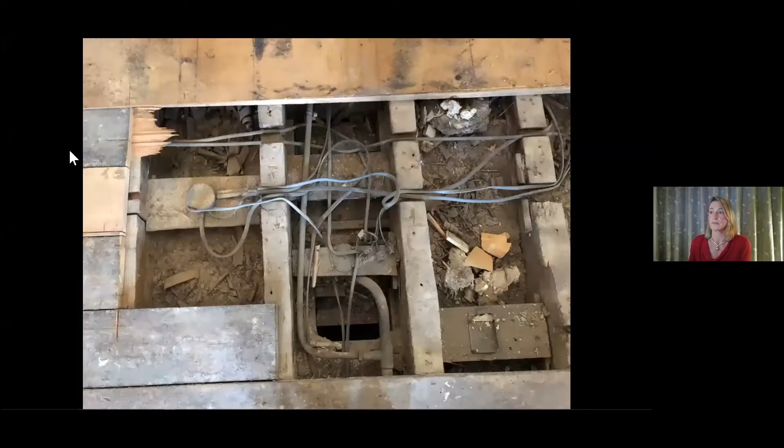Oh, sorry, I've gone too far. Oh, there we go.

It's the excitement of discovery. So even now, when I've been grubbing around under floorboards for nigh on 30 years, not quite, Ian, it's still exciting to find out about a building. So my colleague Prema and I visited a site a couple of weeks ago. The lovely maintenance team had raised some of the floor for us so that we could see and measure a beam that we knew was there because it downstands into the room below.

And we were faced with this rather unpromising pile of dust and joist tops and apparently no beam, until we went up close and did a bit of dusting and revealed the top of a steel flitch sandwiched between two chunky timber sections. The beam was there, but hidden in the dust and the pugging layer and the services. And it runs under the floor like this.

It's a connection with our predecessors. We can use their drawings to get an idea of intention, at least, even though there are clearly never any guarantees that the building was built that way, or indeed that it is still that way 40, 80, 280 years on. This work forces really good observation skills. There's no point being able to do brilliant mathematics if the materials you're working with are flawed.

You need to know about a wider group of materials than we get taught about in our standard university curriculum. Cast iron, wrought iron, vaulted masonry, timber, poor quality early concrete. You need to understand that the failure mode of a cast iron beam is completely different to the failure mode of a timber beam. And that difference will inform your attitude to risk in those different situations.

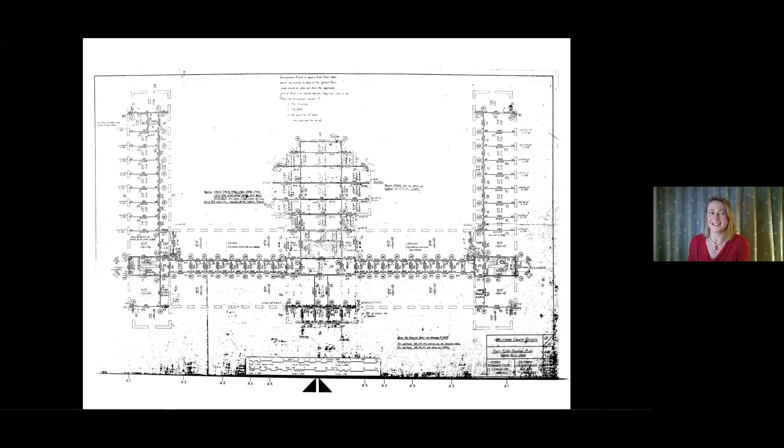You need to understand the history of the building itself, what it was built for, how it developed over time, whether it's had any major refurbishments, and therefore what techniques and materials might be associated with that. And you need to be able to put yourself in the shoes of the person who built it. What were they trying to achieve, and did it do what was intended? It's a world in which you have to expect the unexpected.

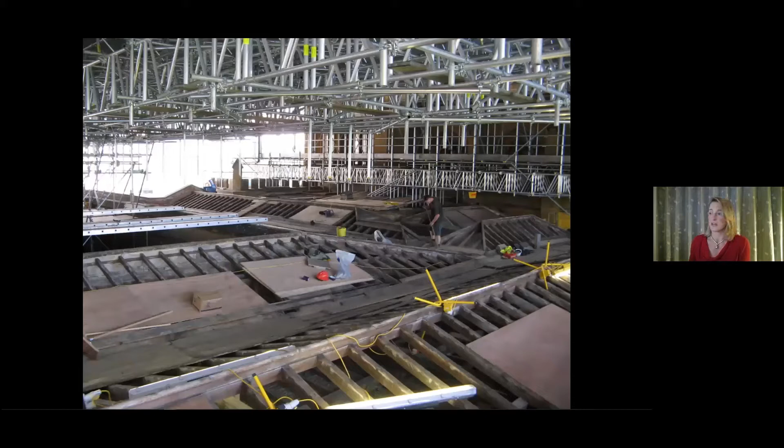So this is Toddington Manor, high Victorian Gothic in Gloucestershire, Grade 1 listed, built in the early to mid 1800s, local stone and timber and some cast iron. And these are the roofs. They look, if a little shallow, perfectly normal and regular, and indeed they turned out to be made of really lovely high quality oak. And when we opened them up, they had a perfectly sensible arrangement of trusses and purlins.

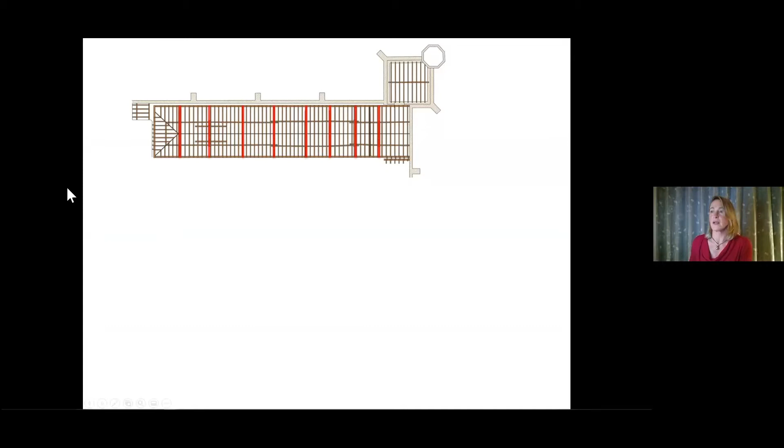So this is it on plan. But when you look in elevation at the trusses, they are completely mad. Each one is different from the next for no apparent reason whatsoever. It's like the carpenters were having a competition to see how many different ways they could span a space.

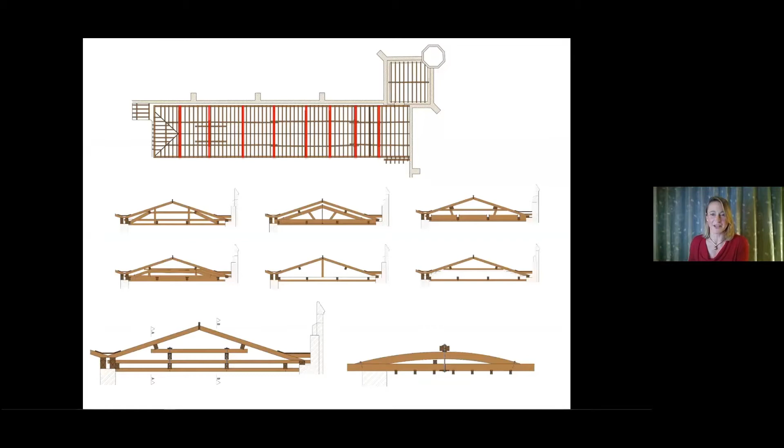What it isn't is guesswork and instinct. Although some of the things I will show you started from an instinct, the instinct comes from experience and it's supported by science. So we observe, we test, we do calculations which we know are flawed and yet give us a feel for what we may have in front of us.

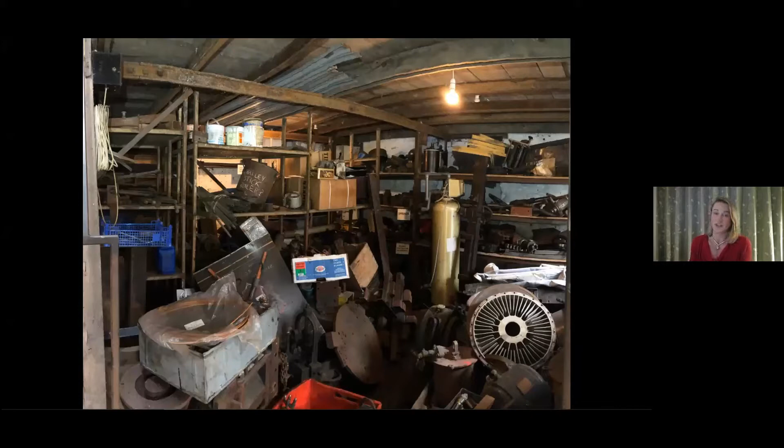We use technology as it becomes available, especially in measuring and monitoring. It's a world where you have to be a bit clever in how you test things. So this is a building we're working on at the moment in Wales. It's the Festiniog Steam Railway. And the mezzanine floor structure in this building is formed not from beams, but from sections of rail, because of course, that's what they have to hand. And it has some pretty weird connection details. So the column, the primary beam, the secondary beam, and the corbel on which the beams all sit are all sections of rail.

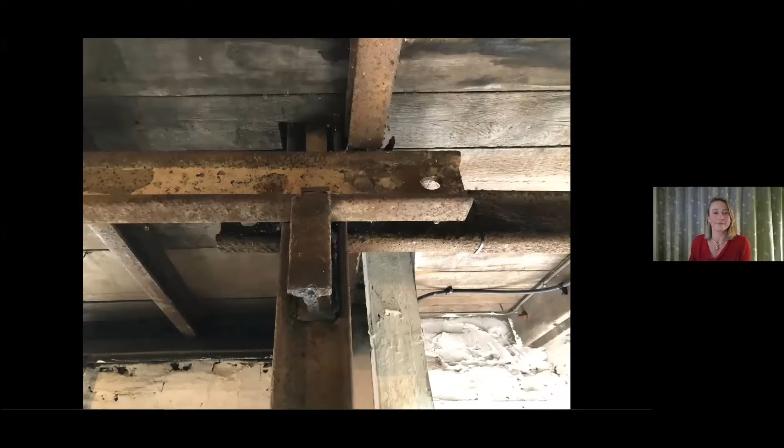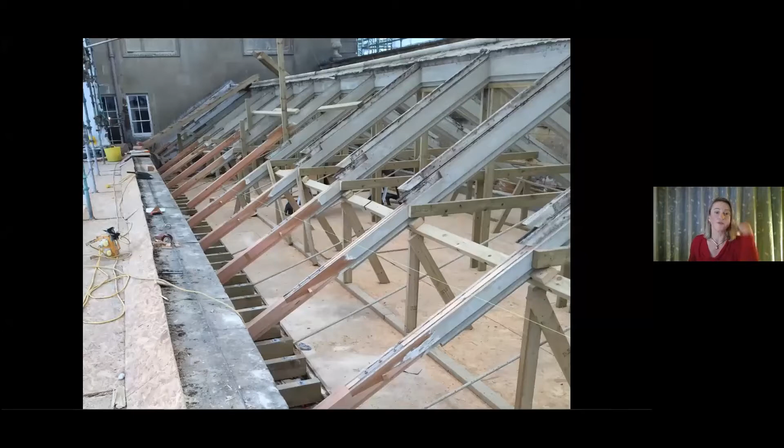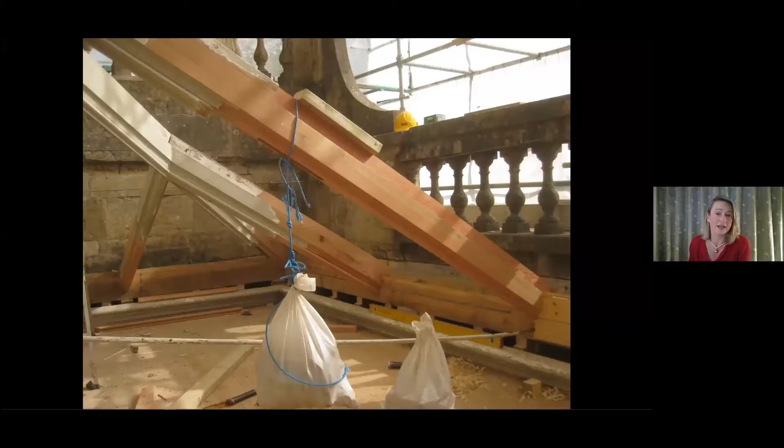There are undoubtedly moments when it all feels a bit like this. And while it's not guesswork, it does force you to use engineering judgment. There are no codes to tell you whether your slightly rotten beam end is still well within capacity or right on the edge of viability. You have to be ready to consider how something might fail and therefore whether what remains is sufficient with sufficient safety factor. You have to question whether you need to repair or strengthen or whether you can just leave something alone.

So I'm going to show you 3 buildings from the many we've worked on over the years, and they show 3 different approaches. One is fairly typical of the interventions we make. It's visually unobtrusive, but very necessary to support the ongoing life of the building. A second has 2 examples where we could have done a lot more work, but managed to monitor and negotiate our way out of doing anything. And the third one is a quick one, which is a much more modern example. And as always in these kinds of projects, the skill lies not so much in designing the solution, often that bit is relatively easy. The issue lies in defining the problem and agreeing the constraints. So onto some case studies.

This is Boston Manor. It's grade 1 listed, it's in West London. The main core of the building dates from 1623, which is these 2 gables here, this block here. The third gable on the left was added in 1671, and the 2-storey extension, which here is hidden behind the trees, was built sometime in the mid-1700s. And it's an amazing building. Inside, it has some really lovely 17th century plaster ceilings, and it's really very elegant. But it has had a bit of a ragged history. The poor building was bombed in the Second World War. At that time as well, it was a school. So it was a school between about 1940 and 1961, and it was last comprehensively restored in 1963.

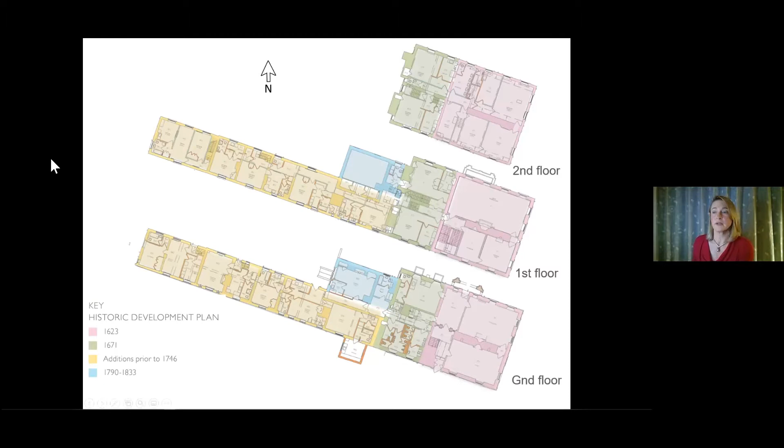So Chris, my colleague Chris, and I did some extremely careful opening up. This was one of those buildings where we needed listed building consent even to lift a floorboard. And we worked out floor capacities, we looked at deflections, we worked out where we needed to do little bits of strengthening to a very few primary beams to increase capacity just enough to make the business case work, which I'll come back to in a moment. And it's a fine balance between wanting to do as little as possible while still giving the building a viable future.

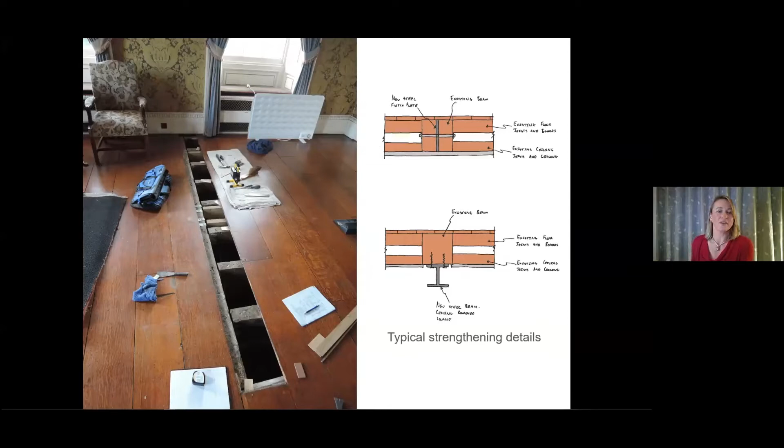It might just be worth noting that the flitch detail in the top here is one that we use a lot in listed buildings. Essentially, you cut a slot into a timber beam and slide a piece of steel in to provide stiffness and strength. It's quite a skilled job, but we use it because we want to retain the detail of the joist connection to the primary beam. If it were an unlisted building or a more ordinary beam, we could achieve the same outcome with something simpler like a channel or an angle section on either side.

So in order to know which floors we're going to strengthen and which we will leave alone, we produce these diagrams of load capacity. So on the left is the existing situation, and the red, amber, green coding relates to the live load capacity. So red is less than 0.75 kilonewtons a square metre, so less than half of a normal domestic load capacity, whereas the green is 2.25 kilonewtons a square metre. It's nearing a full office loading by modern standards.

So given that the client was going to be able to manage the building very tightly and the use was relatively light, I mean, a meeting in one of these rooms might give a live load of less than a kilonewton a square metre, we didn't think it was appropriate to bring the whole building up to modern office standards with all the intervention that that would have meant. In discussion with the client and the architect, however, we chose to strengthen to reach between 1.5 and 2.25 kilonewtons a metre squared, which allows two middle-sized people across every square metre of the floor plate, which is surely more than enough. So on the right-hand side, you can see the proposed situation where all the spaces on the first and second floor have become either yellow or green.

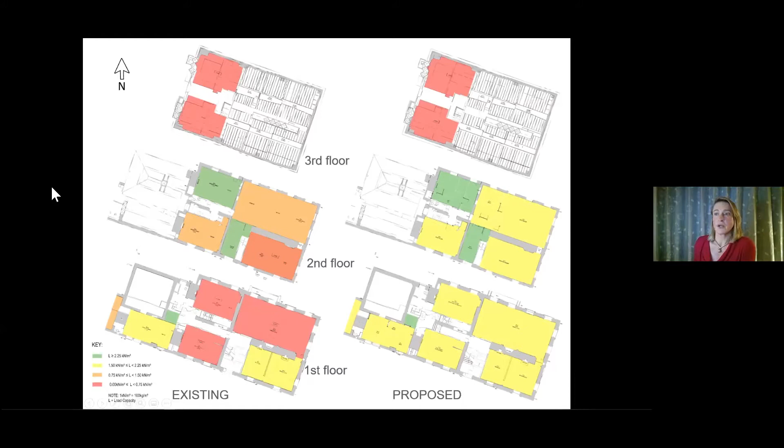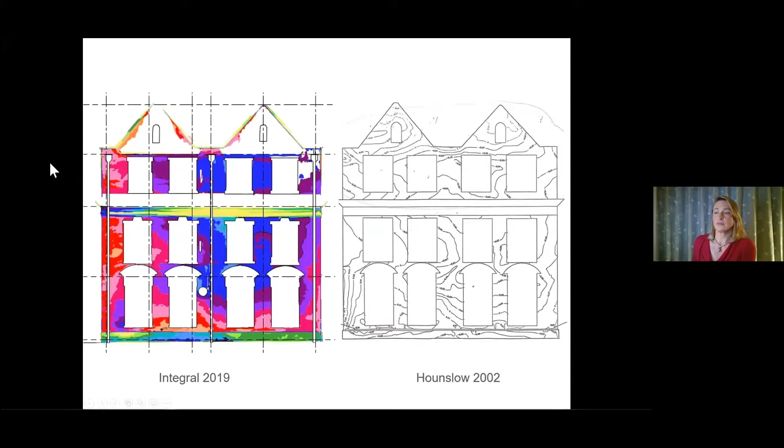We use point cloud surveys to create contour maps of the brickwork faces, because the brickwork is bulging, and we wanted to see if it got any worse since it was last measured by Hounslow in 2002. And move that on. So, and we did a lot of timber repairs in the extension building because that had suffered enormously from water ingress.

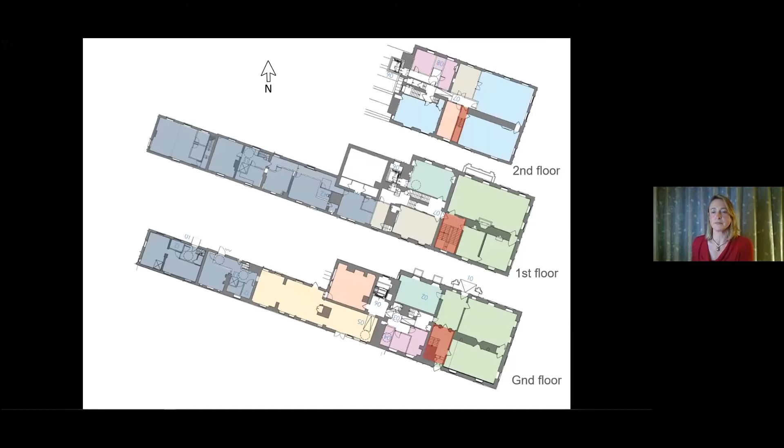But the thing I particularly want to talk about is the main staircase, that one here. Because this is a great example of the importance of defining constraints and how a solution which seems really simple is the result of some very careful analysis and negotiation. The stair is very important historically. It dates from 1623. It's the oldest part of the building, and it's decorated with some really very fine and very rare hand-painted wallpaper from the 1750s. Any work on the stairs, therefore, needs to be really careful of the paper and also needed to respect the original structure of the staircase itself.

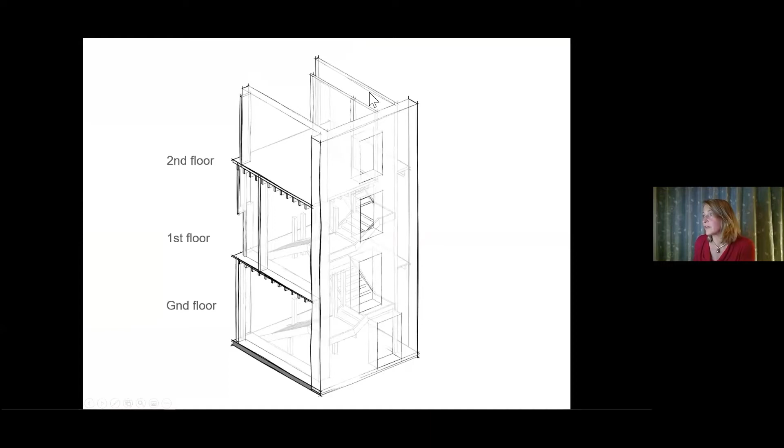So the staircase is surrounded by masonry walls, so right round here, and this one is slightly lighter wall. And if we remove the walls, we can see that this is the staircase with the floor structures around it, and the stair was in a bit of trouble. There was a significant slope across each tread of about 100 millimetres, particularly in the section from first floor to second floor, and it was very lively. When walking up and down, you could actually see it deflecting.

To define the engineering constraints, we needed to understand how the stair was structured, and it was fairly clear that the deflection was a result of a complex load transfer path, with loads from the second floor being transferred through two quarter landings to the first floor structure. So the two quarter landings to take particular note of are this lower one and this upper one.

So to know more, we wanted to do some opening up work, and we could see that the underside of the stair had been replaced at some point in the past, which gave us a way in without damaging original finishes. And some initial gentle opening up revealed modern plasterboard, which meant we could uncover all of the structure, which certainly would not have been possible if we'd had original intact finishes.

Further opening up showed that the lower quarter landing had been replaced entirely with relatively modern joists, yet it still wasn't stiff enough to stop the landing and thus the stair flights from rotating. So we had an idea about how to stiffen the staircase or stiffen the lower landing, replacing the lower landing with a new arrangement of a cross member spanning between the walls and a cantilevering member to pick up the stair edge. It's a slightly unusual arrangement, but it should work.

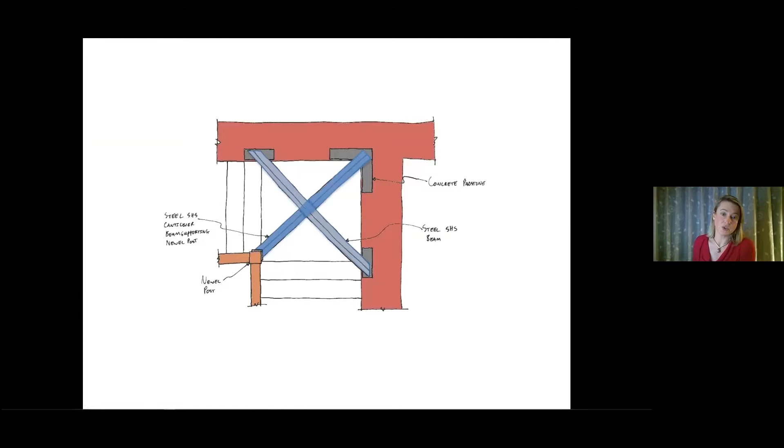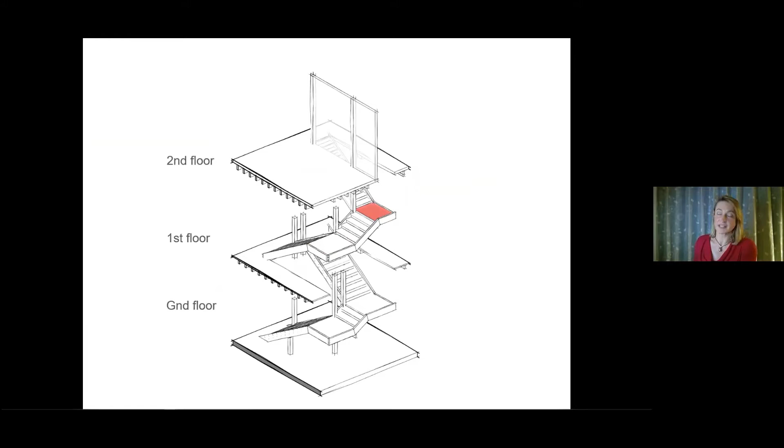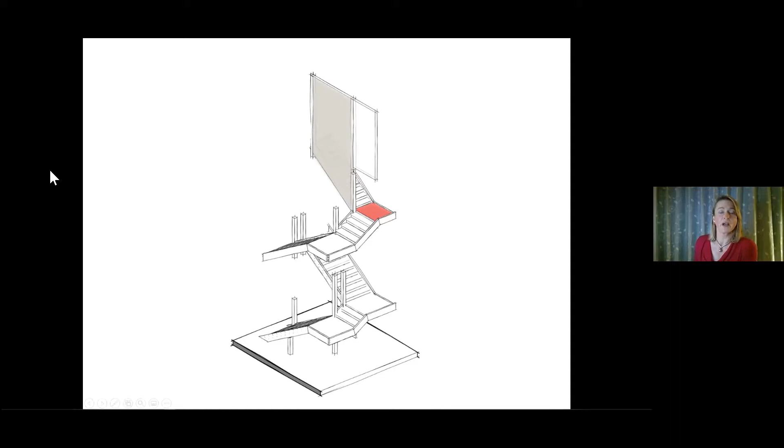So that dealt with the lower landing in principle at least, but the upper landing couldn't be treated the same way because the original landing timber was still in place, and we didn't want to put structure below because it would be visible, which would be a shame. However, here we had the advantage of a wall, which went from the stringer right to the ceiling, through the second floor and to a truss above, which we could call into action. And we thought we could potentially slide in a hanger of some sort to support the corner of the landing.

Initial calculations showed that it would be very hard to justify the staircase if we simply tried to put a standard staircase load on it. Yet this stair is a primary escape route and the building was going to be far more heavily used than it had been for many years. So we couldn't just say it's survived so far, it'll be fine.

Going back to our floor capacity diagrams, we could see that the rooms the stair served couldn't be justified for normal standard live loading. There was no way from a conservation point of view that we could justify the strengthening work which would be necessary. So we were already in a situation where our client was going to have to manage the building carefully to ensure the rooms weren't overloaded. So there was no point trying to strengthen the staircase to carry a theoretical load it would never have to carry.

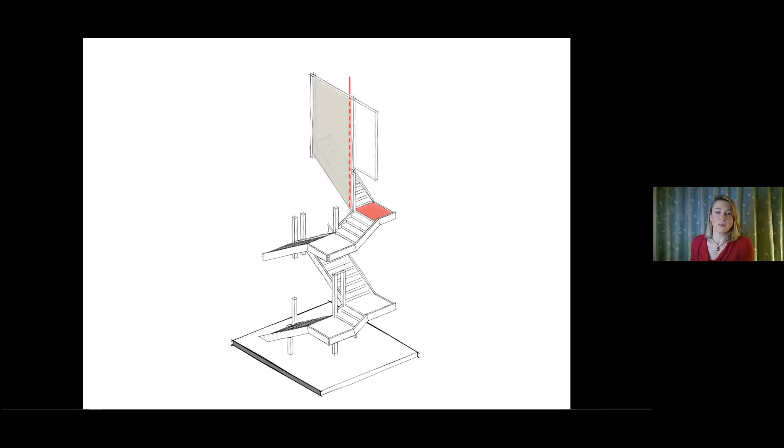So there followed some fairly lengthy negotiations with the fire engineer, building control, the client, working together to ensure that room use, fire escape requirements, stair load requirements, and the business case for room bookings were all aligned. And make sure that no one element hugely outweighed another, or indeed that no one element was the primary constraint. So once we had a figure to work to for the maximum number of people on the staircase at any one time, we could turn our attention back to the detailed design of the interventions.

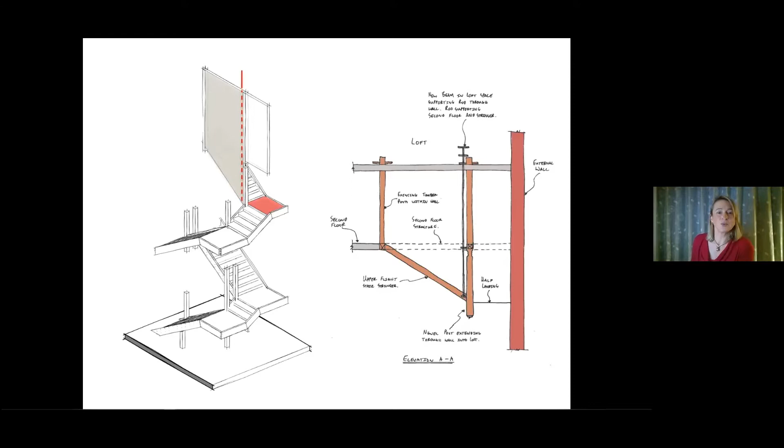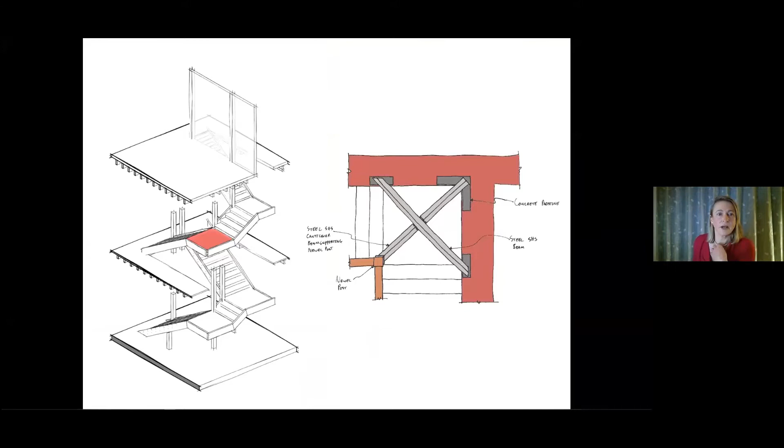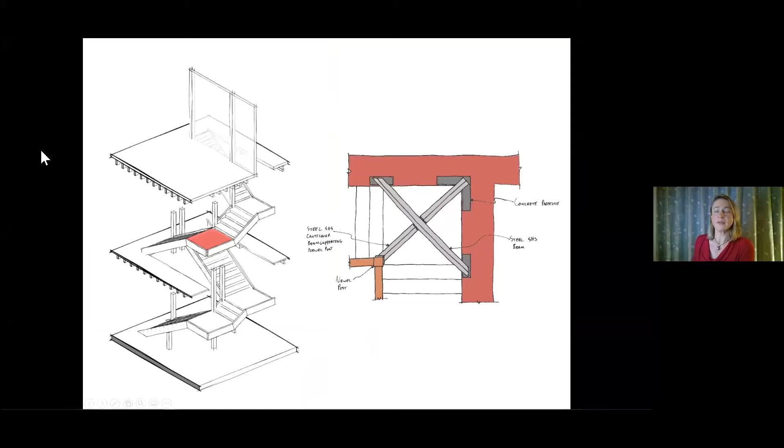The lower landing, going back to that lower landing, where we had this idea of how we were going to do it, the lower landing was incredibly shallow. So the original design of cross members had to be packed down into a single plane, which meant that the whole thing had to be prefabricated off-site so that all the connections could be fully welded. And that meant the contractor had a bit of a job getting it into position, but they managed beautifully, and the new steelwork is completely hidden in the depth of the landing.

So I said at the beginning that this solution was an example of the importance of defining constraints, and I hope what's clear is that the analysis is not a mathematical analysis, although that obviously is one of the tools, but actually designing the solution is simply the end point of pulling together a lot of different constraints, technical structural constraints certainly, but also conservation constraints, buildability, and a negotiation requiring an understanding of the business case as well as the engineering detail. So the lesson for me here is that the difficulty is not so much in designing the solution, but in making sure we were answering the right question. Did it need strengthening? Yes. How much strength to add?

A much harder question to answer, but definitely not 4 kilonewtons a square metre as the normal loading code might stipulate.

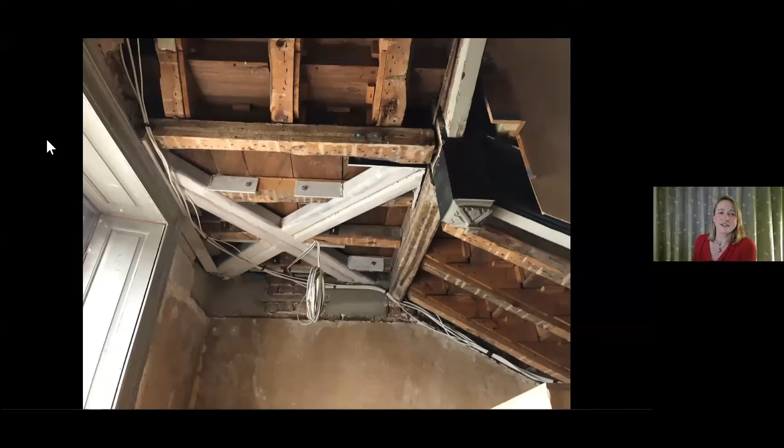So on to case study number 2. This is Middleport Pottery in Stoke-on-Trent. Built in 1888, and it was known as the model pottery because it was absolutely designed and built around the process of making, decorating and firing stoneware. It was an efficient modern factory. And it was also built around some of the Quaker principles of creating decent working space for the employees. So it's an amazing set of buildings.

And in 2010, when our client, the Prince's Regeneration Trust, bought the site, the pottery was a thriving business. There was nothing wrong with it economically, except that they no longer needed as much space as they had. So they were struggling to maintain the sheer number of listed buildings.

And they decorate it in a unique process called tissue printing, where these incredibly skilled ladies, and they are all ladies, wrap the intricate shapes in tissue paper, and somehow they do it without making visible creases in the pattern. It's extraordinary. And all the while they are chatting at a rate of knots without even looking at their hands. It's absolutely amazing to watch.

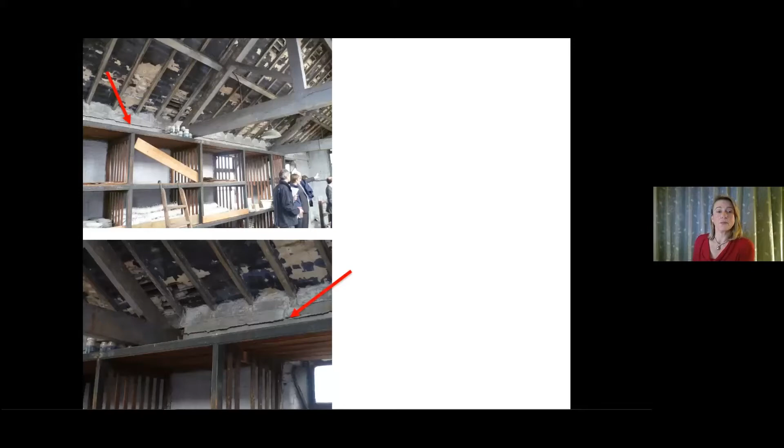But before that work was done, we were appointed to do the main project. And we had the privilege, we weren't appointed just to do emergency works, we were appointed knowing that we were going to be messing around on this site for a few years. So we were able to take a less conservative approach and spend a lot more time looking and contemplating.

And what occurred to me was that while there was clearly movement on the inside face of the wall, it wasn't reflected on the outside face. That appeared to be absolutely straight and vertical with no movement at all. And we wondered if there was a different cause, and we managed to get some opening up works done. And when we did that, this is what was revealed. So the rafter appeared to be sitting happily on its wall plate on the outside face of the wall, and the brick on the inside face had slightly unusually been built right up to the underside of the boarding.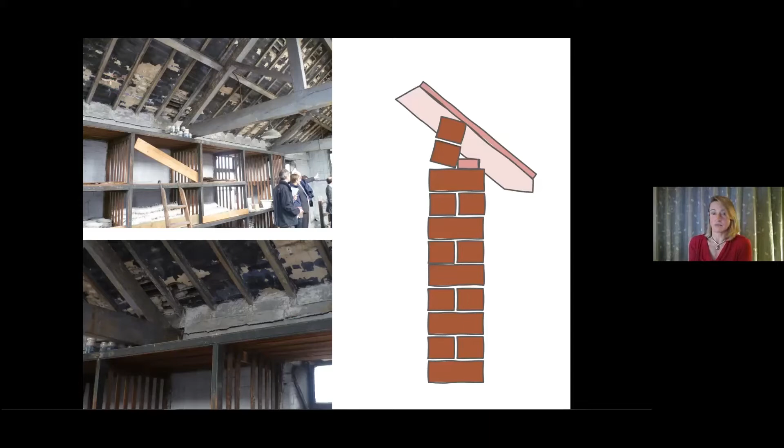So there probably had been a bit of movement in the early days, as you would expect as any roof settles and takes up the load, but nothing on the outside indicated that the movement was ongoing. So slightly with my heart in my mouth, I said we shouldn't do the work right away. We should keep the money for repair in the budget, but in the meantime, monitor to see if the situation changed. So for 2 or 3 years, every time I went to site, I anxiously looked at the wall to see if it had shifted at all.

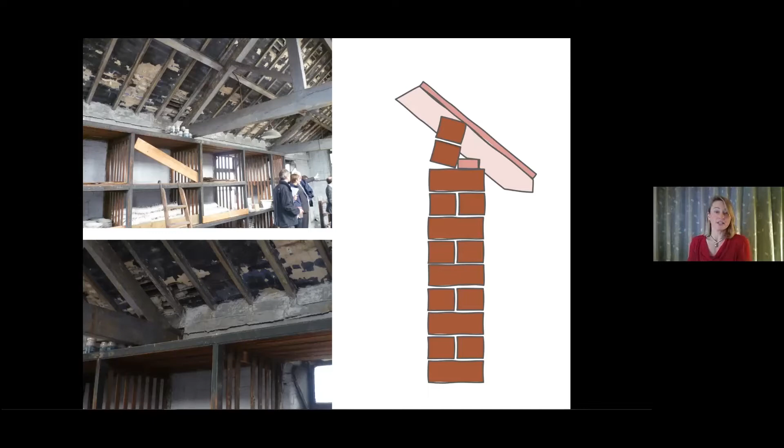With time and observation, we can save material and program and expense, but our clients do need to give us that time, because believe me, it's much, much harder to say do nothing than it is to say do something. At least if you've done something, your clients feel you've earned your money somehow, which is completely mad, really, but also entirely understandable.

This was a much scarier one. This incredible space is where they store all the moulds for the last 100 years or so. So when they make something which is an intricate shape, like a Toby jug or a teapot or a little cow-shaped jug like this chap here on the right, they make a mould for it. And they pour slip clay in, which is basically thinned down clay. They pour it into the mould, let it dry for the right amount of time, pour the remaining wet slip back out again, and then pull the mould apart to reveal the shape inside.

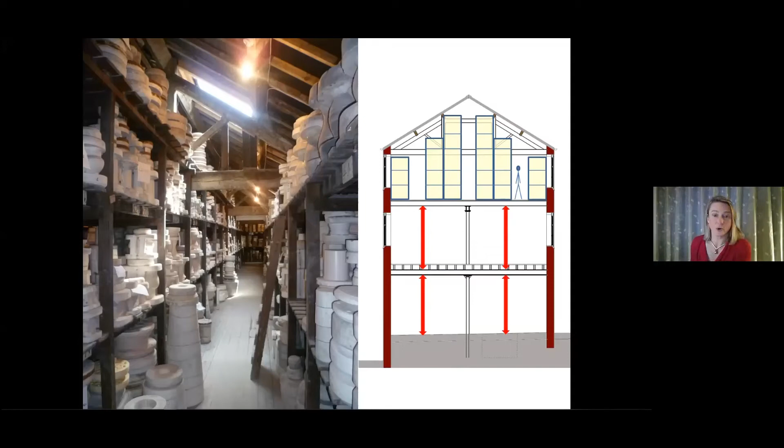So how do we tackle this? Can we do nothing? Is that an option? We thought not. We thought the stresses were far too high to take that risk. The straightforward answer was to try and make it right somehow, to strengthen the structure to make it work. So we considered putting in additional props to the primary beams, as we'd done with the emergency propping, but that was incredibly disruptive to the floors below.

So we considered putting additional beams across the space in between the primary beams, which would reduce the load on the primary beam and reduce the joist span by half. It was probably less disruptive, but it was still costly and difficult to achieve in terms of getting long beams into a tight space. So, having convinced ourselves there wasn't an easy strengthening answer, we turned the question the other way around. Why did the archive want to be on the top floor?

It's a mad place to put any heavy storage. Social history says the molds go in the attic, but every other driver says put them on the ground floor. For example, availability for cataloguing, visitor access for people who want to see the collection. If they stayed on the top floor, we'd have had to get lift access up there. By putting them on the ground floor, we would avoid the need for a lift, as well as the need for structural strengthening.

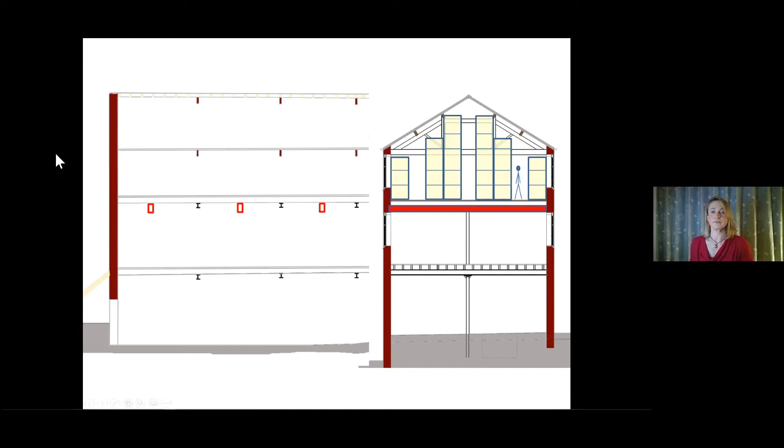So there are 3 lessons for me here. One is the importance of quiet time when you're getting to know a building. It's really important to know your client and know their aspirations, but it is equally important to spend time away from the rest of the team so you can really concentrate on your own expertise, because engineers see things in a different way. And it wasn't until we had time to relax and observe properly that Kim and I saw and felt the issue.

The importance of asking the right questions. Rather than heading straight for the how, ask why. We had numerous options for strengthening, but actually, when viewed in the round, the answer that arose out of a technical and economic necessity, moving the archive rather than strengthening the floor, also answered a series of other questions about accessibility that was starting to look hard to solve.

And the importance of bringing your client with you. In both cases that I've shown you on this project, we were able to explain clearly what our strategy was and give them the options available. And ultimately, the choices were our clients' choices. We provided the technical options and gave a balanced critique of each one so that they were in a position to make the decision that was best for them.

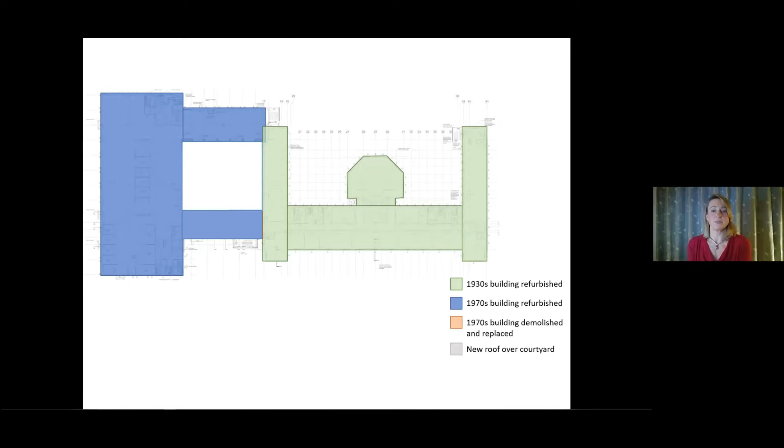And to cut a long story short, it was absolutely impossible to justify in carbon terms demolishing the building structure, even when you took into account the opportunities created by replacing it with something in, say, timber and steel with perfect insulation, passive ventilation, looked at over many years of life, it wasn't possible to make the case for total demolition. There was simply too much carbon embodied in the concrete frame. So we took the save and adapt approach.

We took out the drop ceilings to expose the concrete soffits. The architects insulated the walls and roof. They put meeting rooms, which needed mechanical ventilation anyway, in the centre of the floor plate, so in here, where the lack of light for people for limited periods wasn't an issue, and indeed, when doing presentations, could be positively beneficial. And we did limited but high value structural alterations to open up spaces, especially at the ground floor level.

The circulation issues were sorted with the only section of demolition and rebuild in the project. The building at the front was demolished and replaced with a lightweight steel and glass entrance, which not only creates a more obvious welcome to visitors, but also houses stairs and lifts, allowing people to move relatively easily between the 1930s and the 1970s buildings.

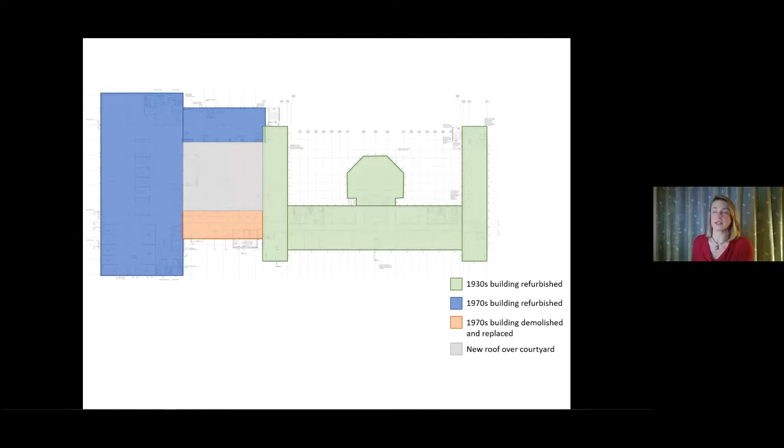And while the architecture of the 1970s building may not be entirely to your taste, what I like about this case study is that it demonstrates the same approach we use in historic buildings. And that approach is equally applicable to much less glamorous buildings. The same need to spend time understanding what you're looking at and what you're working with, the time taken to think through the options, the same regard for the fabric, no matter what its historic merit, purely because it's already there and already functioning.

And the project was highly successful. It's not only a welcoming and well-loved building for users, it also performs really well technically, and it saved the council a great deal of money, not only in the build, but also in the running costs.

And to take the carbon counting piece just one step further, I want to give you some figures. So the better end of our new build projects sit in the range of between 200 and 300 kilograms of carbon per square metre. So 200 would be, say, a wholly timber building, and 250 might be a steel timber hybrid, and 300 might be a steel frame with precast concrete floors.